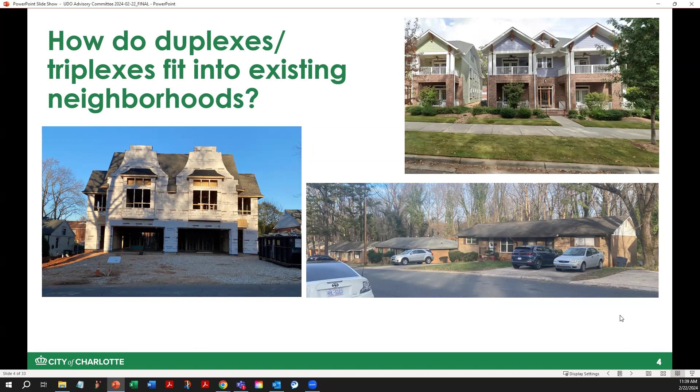As we talk about fitting into existing neighborhoods, we've seen a triplex development introduced right now in South Charlotte that I think a lot of people have heard of, so I wanted to bring it forward. This triplex development is creating a lot of conversation, and I don't think it's as much the height or scale of the development, though we can talk about that too. I think it's a lot about parking and driveways and what that looks like. That's where we're going to focus our conversation today — how the parking and driveways for structures relate to the community that's already existing.

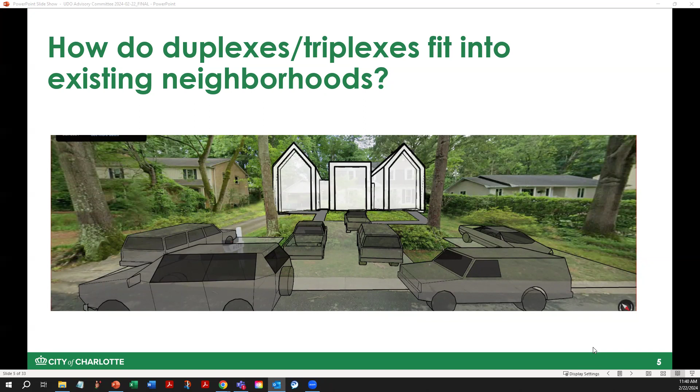As I mentioned, we've heard a lot about scale. We've heard about stormwater, which has been discussed a lot recently because of additional stormwater requirements introduced into the UDO, due to concerns about flooding and drainage in residential neighborhoods. We've also heard issues about fire access when you have additional units, because the fire department views structures differently — a single family home versus a duplex or triplex. How are we ensuring tree-lined streets? Is there a locational criteria? We've heard some of those things, but today we really want to focus on parking and driveways.

Before I show some additional pictures, I want to be really clear about what we can and cannot regulate, because this is important. When we start showing pictures, you may like the building from an architectural standpoint, or you may hate it, but there are some things we cannot regulate. So as we talk about preferences and what we want to keep or change, understand that we cannot regulate building design elements for structures subject to the North Carolina Residential Code.

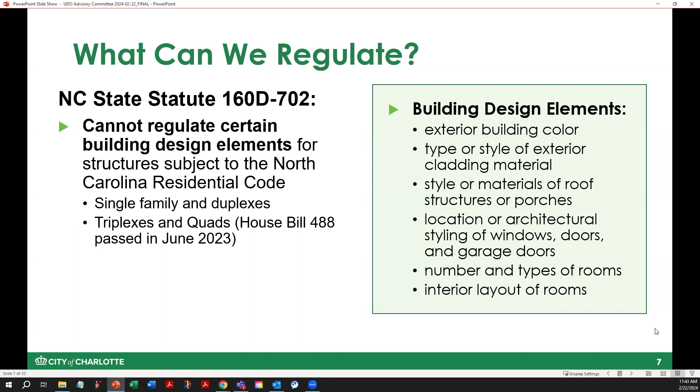There are some nuances to this, but generally that has meant duplexes and single family homes. Until recently, a bill was passed in June 2023 that extended that to triplexes and quads. So that means we can't tell you what color your house is, the style of external cladding, materials, roof pitches, or porches. We can't regulate the location of your windows, doors, or garage doors, or the number and types of rooms and interior layout. Also, though it's not part of this bill, we also cannot regulate home ownership or rental. I wanted to make that clear.

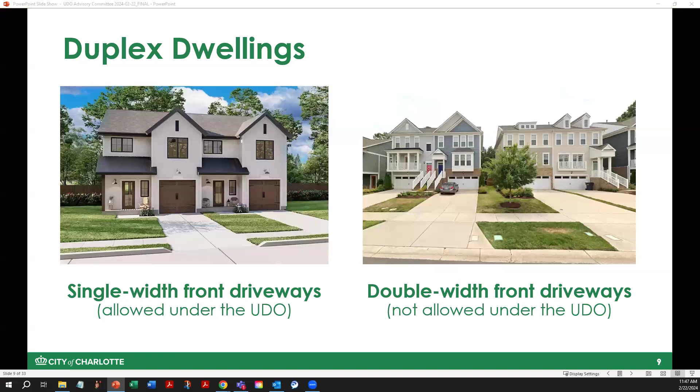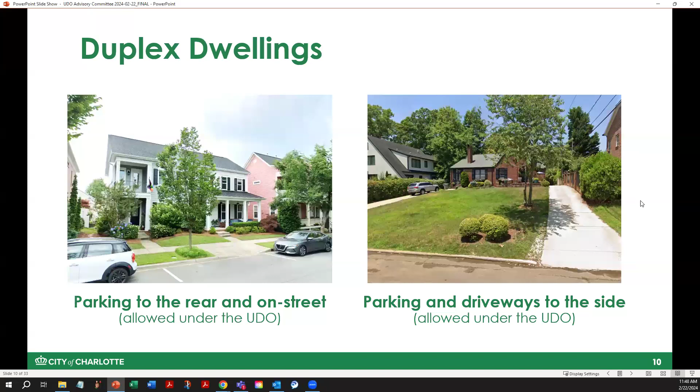Next slide. So a couple of other examples. These are duplexes with parking in the front and/or to the rear and on street. This, of course, is allowed in the UDO. Same thing onto the picture on the right. This is a duplex actually down the street from my house. Parking and driveways are to the side of the structure, and this is also allowed.

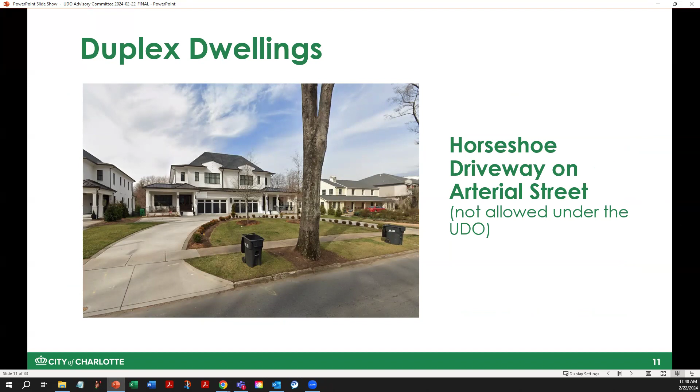This is an example on Kings Drive. This is a horseshoe driveway on an arterial street. This is not allowed under the UDO, but this is something that you'll see a little bit later in the presentation that we are considering, just wanting to account for the fact that having a driveway where you're not backing a car onto an arterial street may not be the most safe thing for us.

Is really managing the car requirements, which I'm sure Eric is thinking, well, what if we just don't have parking requirements? Which I'm with you. But even still, I think from how these are actually utilized, whether you change your parking requirements or not, you still have 3 families, probably at least 3 cars if not more, and then trying to understand how you're allowing for those cars and the interaction with the pedestrian environment and the structure within an existing neighborhood. So even today, we wouldn't allow a double or single width front driveway for a triplex just because of the amount of driveway width in the frontage.

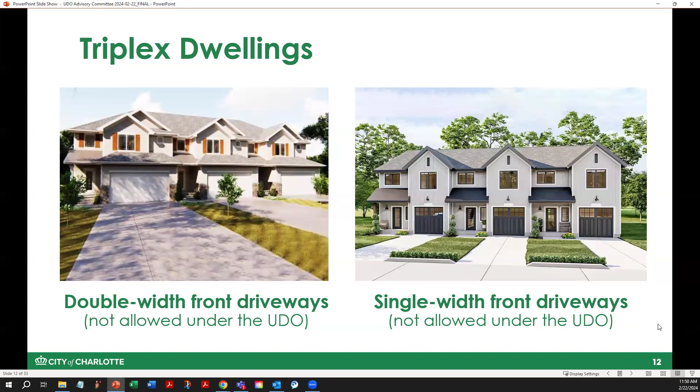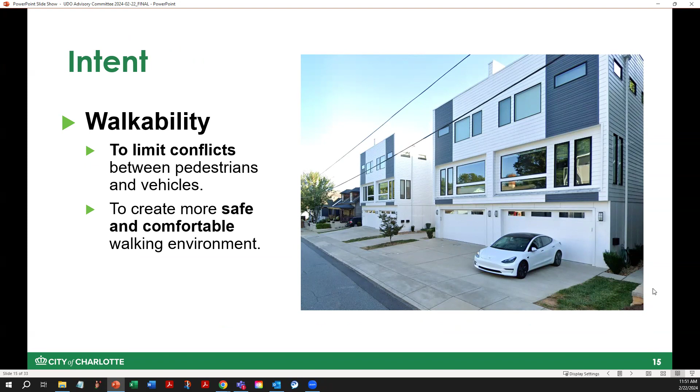Just wanted to touch on the intent of the standards right now. It's about walkability and the pedestrian environment. I think these structures look kind of cool, but I have concerns about the lack of green space between the structure and the street. It's just a lot of pavement, and probably not a place I'd choose to walk. There's also conflicts between pedestrians and vehicles in this scenario.

We want to provide adequate space for required tree planting. That's really important in the comprehensive plan, talking about tree-lined streets as part of the pedestrian environment in our centers and neighborhoods. It's important for shade and temperature effects. Wider driveways also have greater stormwater impacts, which we've discussed a lot, along with cost implications as we introduce wider driveways or bring driveways around the back to manage those impacts.

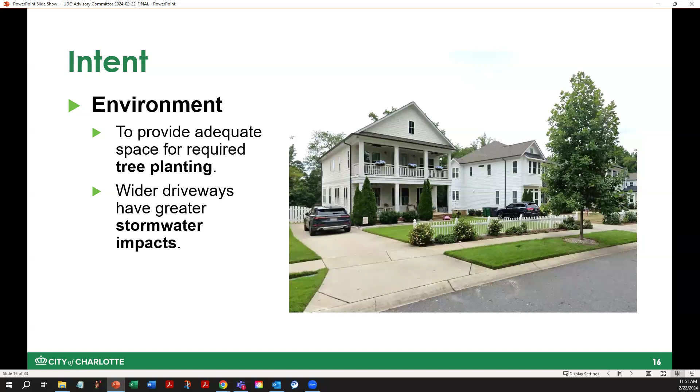And thirdly, landscape yards are often found as front lawns between the residence and the street. This is common in our existing neighborhoods, with limited impervious cover between the residential buildings and the street. This actually comes from the comprehensive plan and the neighborhood character goal.

Okay, so now I'll turn it over to Laura to talk about the current standards. You've seen a bunch of pictures, and now we're going to show things with a lot more technical information. I wanted to start with some pictures to give you a flavor of what we were thinking about and what was allowed and not allowed. So I'll turn it over to you, Laura.

Thanks, Allison. First, we want to go through some pictures of what could be built under the UDO. This is looking down at the site, like you're looking at a map. Currently our standards say the maximum width of driveway and parking between the building and the street is 40% of the lot width. So if you have a 100-foot wide lot, for example—which would be an awfully big lot, but there are some out there—that cumulative width would be 40 feet. But we also cap it at a maximum of 24 feet in width.

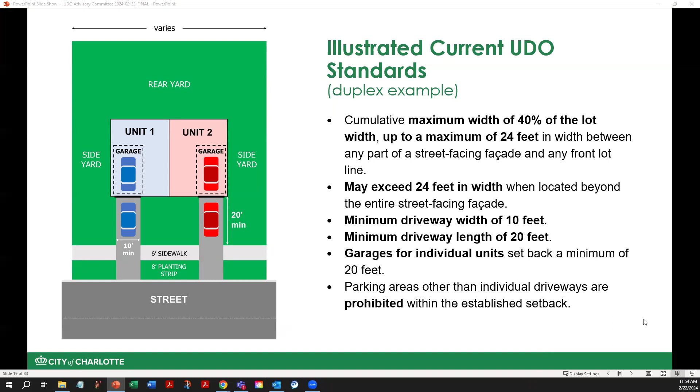If we go to the next slide—when we get to a triplex, which is where there's been a bit more challenge we've been hearing about, you can still have the same standards. This is a mid-block triplex, and off the street you can have 2 driveways again. So maybe you'd have all the parking in the rear with one driveway going to the rear, or one driveway going to a garage in the front and the rest of your parking to the rear, the way the standards are currently set up. So you're not having all of your parking in the front in this case.

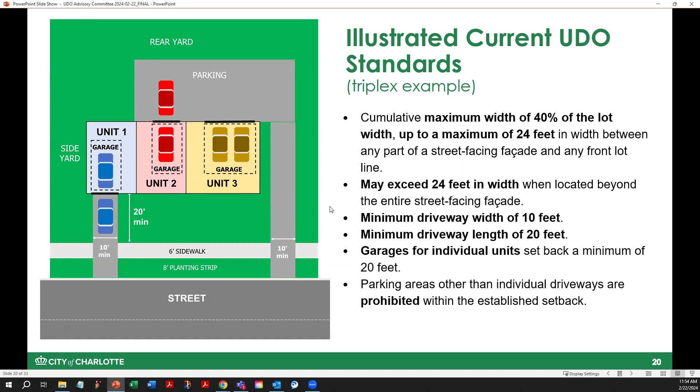But we are going to go through some options—you guys may have others or thoughts on this. We're going to go through a series of possible changes, potential changes to the standards related to this. As we go through them, you may want to grab a pen and piece of paper because we've numbered each one—there are 6 different options. At the end, we're going to ask you some questions about which options you like, which you don't, and so forth. So we will jump right into it.

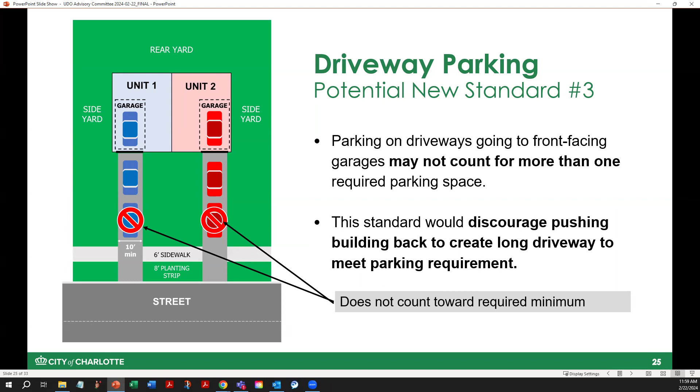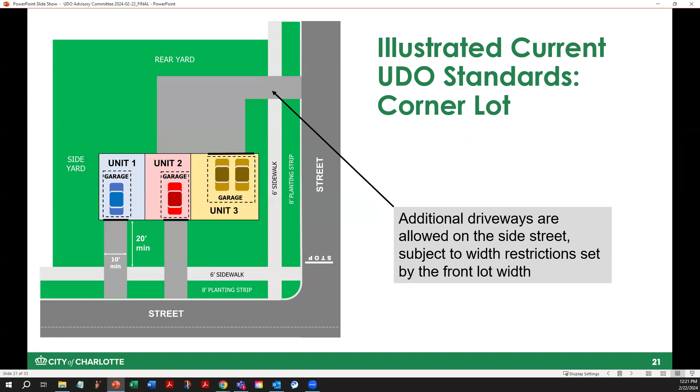And the only other thing I would say, earlier comment about garages and all that - I understand that from John's comment, but we also can't mandate affordable housing either. But what we do is try to encourage it. So we can do the same thing with this as well, trying to find ways to encourage better design and not making snout houses everywhere when they get built these days compared to how they were built decades ago, right?

One other thing that's been bothering me from last week to this week is some of these options presented, and it goes back to this problem that our neighborhood 1 A through E basically could occur anywhere in the city, right? And these conditions are more appropriate in different areas. If you have a more urban area, closer to a neighborhood center, maybe in a more traditional inner suburb of uptown, you would prefer what's already on the ground, looks like some of these standards. And the problem we're coming across is trying to fit all of these things across the board to every single neighborhood 1 A, B, C, D, E that occurs anywhere. It really has to be done depending on the location and where it's located, so it's an appropriate design paradigm for that area.

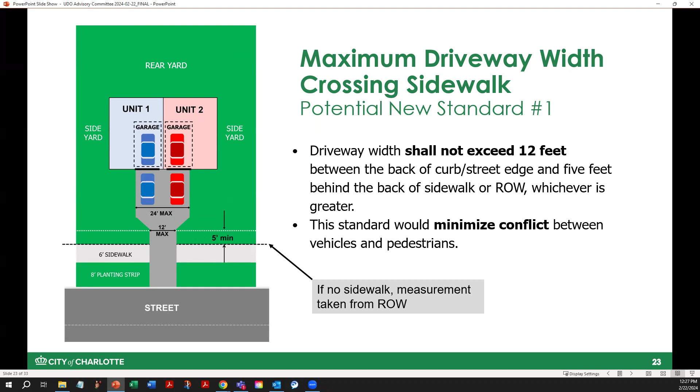Also, on these options, I'm still not seeing how any sort of townhomes or triplexes that would have garages in the front, really 2-car garages in the front, is addressed. So it seems to me there's still the desire to push those parking areas to the rear of the site. Am I getting that right?

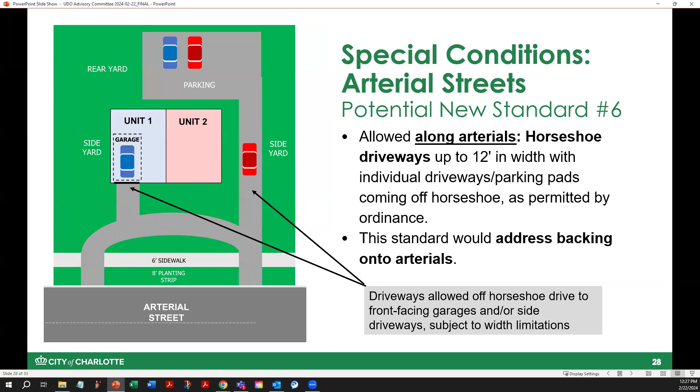I think that's fair to say. We did, though, with the last one, if we can go to that one, Alan, depending on the one before the last one, you had it right first time. Yeah, that gives you more flexibility in this case. You could have 2-car garages, depending, you'd have to work through the design on 2 of those units, if that's what you wanted to do.

Okay, so is there a width requirement of that parking pad area that's behind the setback, but between the setback and unit 2 and 3? No, at that point there would not be a limitation anymore. Dennis, maybe what I should have done there is illustrate that units 2 and 3, if you made the units a little bit wider, you could accommodate a double wide garage in each of those and widen that driveway out. Okay, no, I appreciate the clarification.

And just the last item for me is on potential new standard 4, the 75-foot lot width minimum - where did that originate, or how did you all get to 75 feet as minimum lot width? 40% of 75 feet would give you the 30 feet. So we're maintaining that 40%, but not that 24-foot maximum.

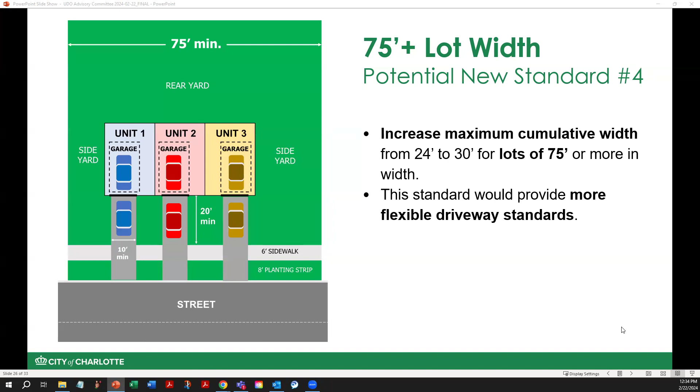But with the 27-foot setbacks, it looks like for these things in the N1s, there's got to be a way—that one doesn't even look like it has an 8-foot planting strip. So I'm wondering, with that 8-foot planting strip being cut up, is there something we can almost do, like in some areas we have this 2-foot utility easement behind the sidewalk. Is there a 3-foot planting easement where, if you can't hit the tree spacing because of these driveways, you start staggering them on either side of the sidewalk?

And just from a practical pulling-out sense too, I always wonder—having those trees right there is super great for the car pulling out. But for the pedestrian experience, I think, just me personally, the one with the flare looked good.

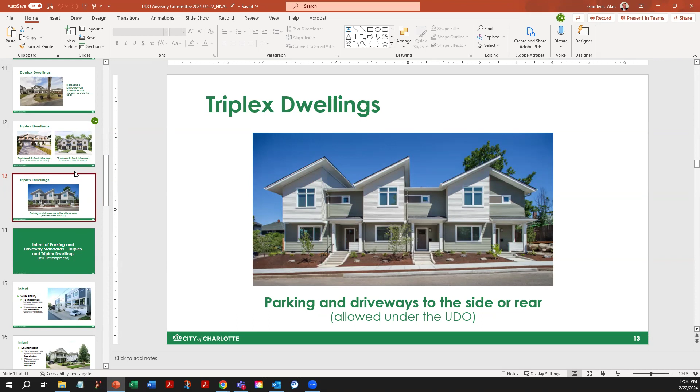If behind a certain line, the staggering of the units—number 5, I think—would really help the experience as well. And Alan, I think what you're saying is you could say unit 2 and 3 is maybe a whole unit, and you get a double car garage there, or you're doing a single, double, and a single, and you're just flaring that out once you get pushed back enough.

Yeah, the idea is you wouldn't be restricted to any width once you get beyond that established setback line. So you could do a double and a single—that makes sense for garages. I mean, circle back—I'm not the expert, Matt.

You've probably looked at every lot in the city, but I was just spinning around Polaris there, and it seems like a lot of, as you're saying, the middle ring neighborhoods—the old suburbia, 40 years ago—it seems like they're around 180 feet deep for the most part. Maybe 150 in some cases.

So it takes away from the backyard of these units, but honestly, people going into townhomes aren't expecting huge backyards where they're going to have the giant poolscape and play set. So I think shoving stuff back into the lot may help that street experience a little bit more. That's all I have to say.

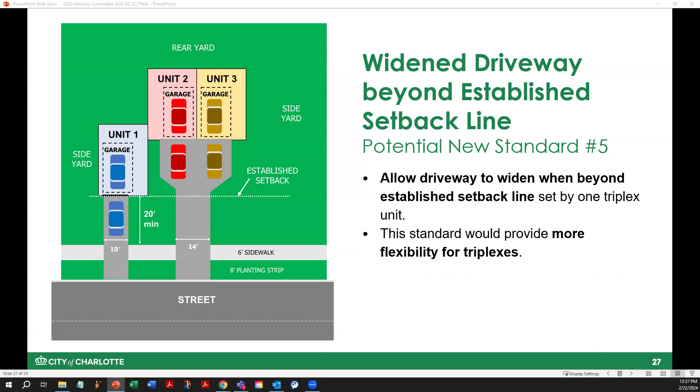Yeah, I think following on that, one of the things we haven't talked about today that I appreciate in the imagery and the conversation here is a lot of the unit form we're talking about is essentially a townhome-type unit, and that's what a lot of the market wants. It's one of those things that fits into the building code in a way that helps with affordability. It also helps with ownership because you can put it on a sublot and sell the land and somebody can own it outright, which is all good.

I wonder if what Roger's talking about—because again, these infill lots are different from greenfield sites being developed from scratch—I was looking at some older 1920s era quads and sixplexes, just trying to see how they were put together and what is in the way today that prevents that from happening. But I'm curious, if you had those 180-foot deep lots, if getting two side by side gives you the elbow room to get the vehicular circulation behind it and still have enough width for viable units.